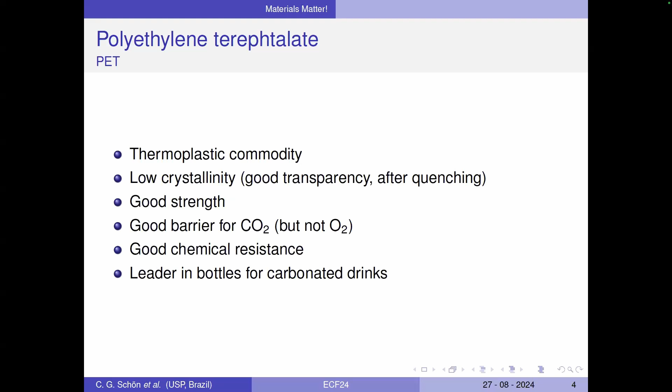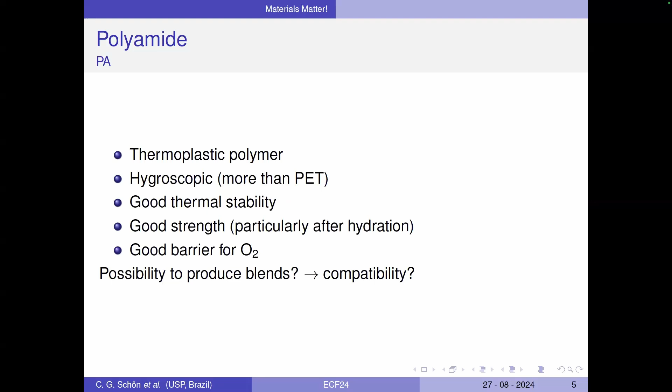Why PET? I don't need to remind you of all this. The important thing is that it is good for CO2 and not for oxygen. So it's not a good idea to place things that will get bad with time with PET. PA has a better performance in this, but has also bigger problems, and this is why we are doing blends. The idea is, of course, is it compatible? We had no idea before starting this.

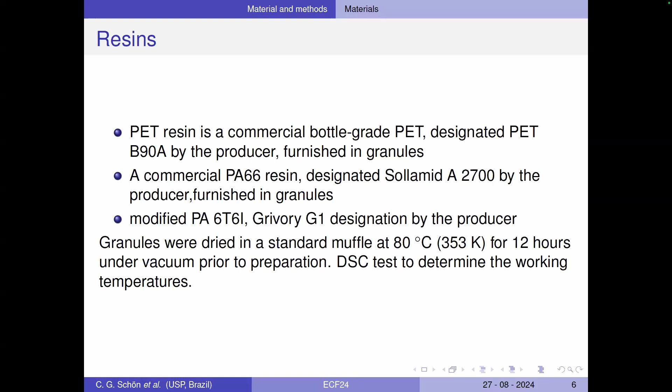My student located which kind of PA resin he wanted to know. First one is a commercial resin, normal that we use every day. And the other one is this one here, which has a terephthalate group attached to the thing. The idea was that this terephthalate group would be better for compatibility. This is the production schedule. A samples are with the commercial PA resin, and B are with this modified PA.

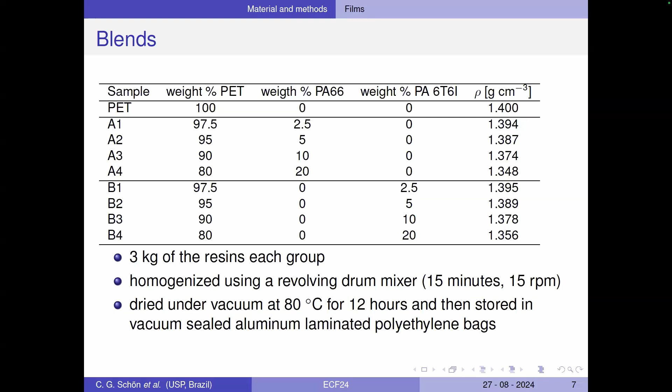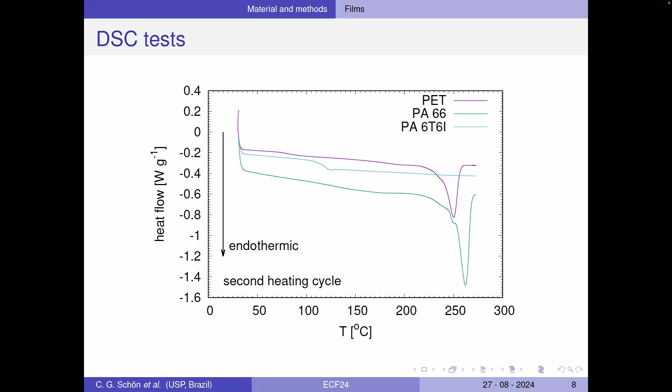We did, of course, a DSC before of the base resins to set the temperature of the processing. And here are the settings for the extruder that we use to produce the blends. One important thing is that this is homemade, so we couldn't control very well the final thickness of the films. They ended with many thicknesses depending on the batch.

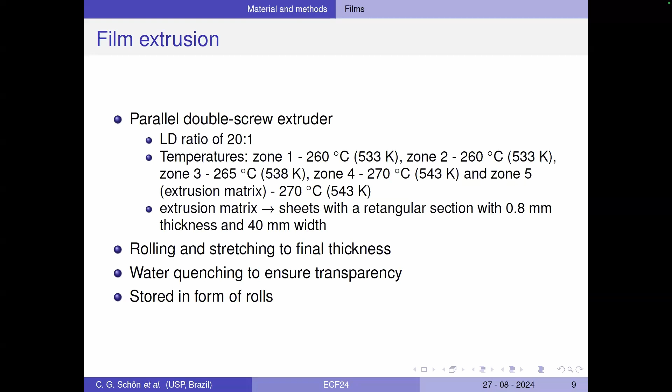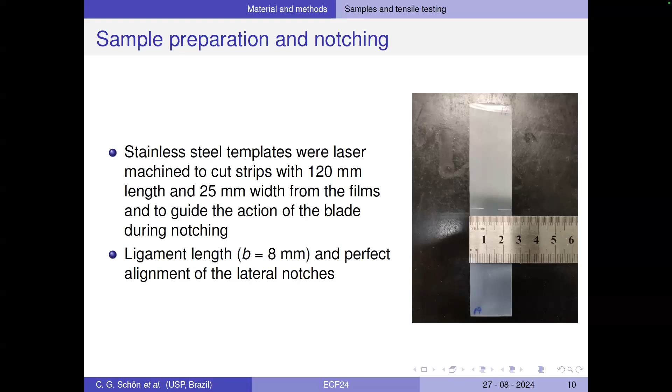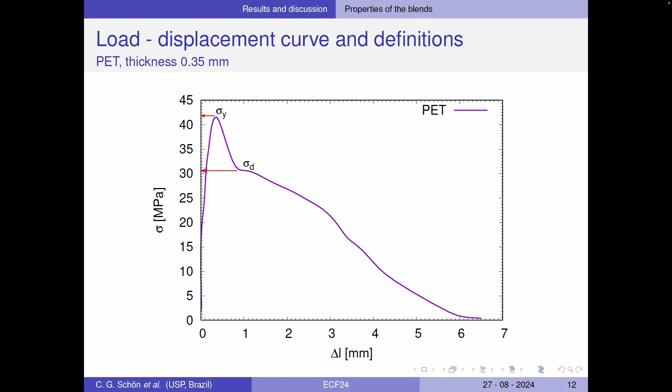The kind of sample we did is a double edge notched tensile test, simply because I wanted to do EWF, and they didn't want to do EWF. So they did it with 8 mm ligament length. They constructed a device to perform the test. And of course, this is the load displacement curve of a DENT test, and to define the two quantities we are reporting here. And also the integral of the curve is the work of fracture, which is specific if we divide by the ligament area.

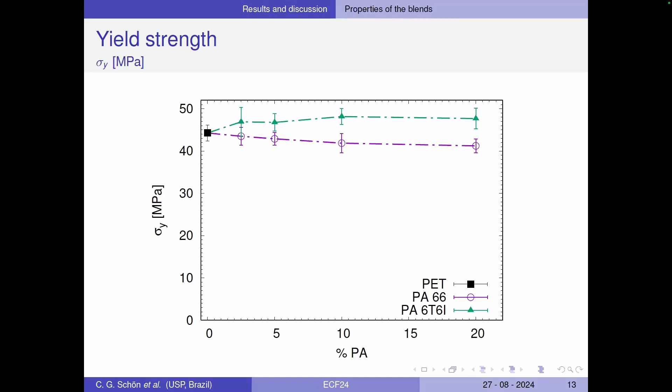Here is the first result for the maximum load. Actually, it's a very good thing when we mix two polymers and nothing happens. It's a very bad thing to report this in a conference, because actually we see that there is almost no effect of PA on the strength of the film. A slight increase for this compatible resin, which is of course much more expensive than the commercial one, and a slight reduction for the commercial.

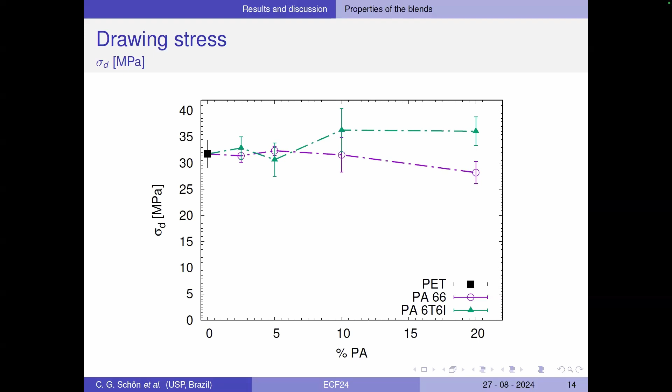The same happens with what we call the stretching stress. Also no visible differences. In the work of fracture, then we see an effect, and of course, if we mix too much PA, we pay with toughness.

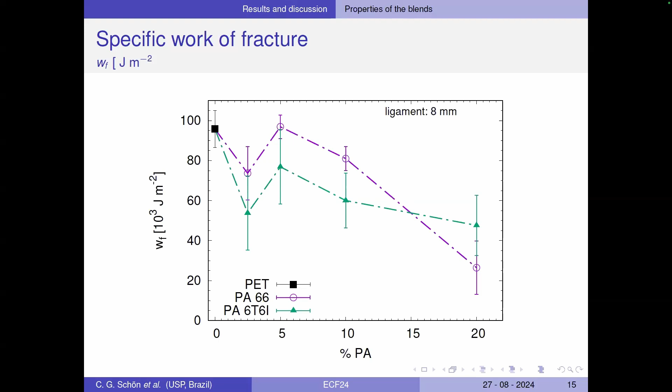And finally, these are the conclusions. So we could produce the films. There is almost no effect in the yield strength. There is also no big effect in drawing stress. The specific work of fracture decreased with the increase of PA, of course.

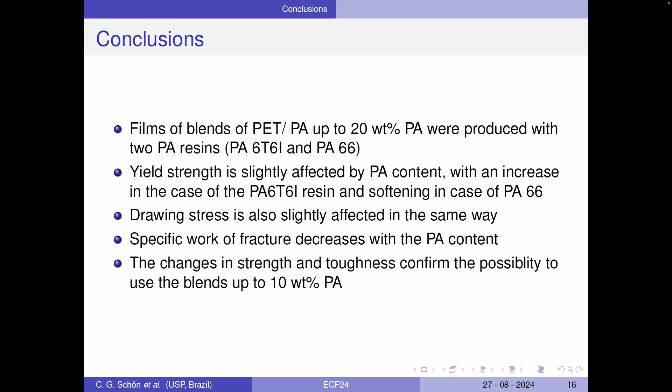And if we combine the two things, we could come to the conclusion that we shouldn't add more than 10% PA in this blend. Just to give information for you, we did the barrier test, and this film is really better as a barrier for oxygen.